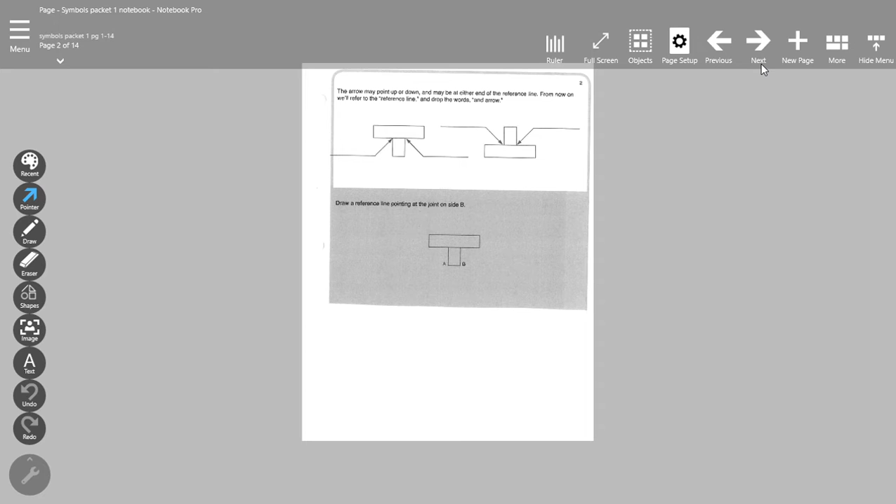So it says draw a reference line and arrow pointing at the joint on side A. So, of course, here's my side A. Pretty simple. All right, so the next one. The arrow can point up or down. Remember, it doesn't change the information. Okay? So, put the arrow pointing on side B. Pretty easy, guys. All right, so if a weld is needed on the arrow side of the joint, the symbol is placed on the arrow side.

So we need to understand that the arrow side is always the bottom, and wherever the arrow points is where the weld will be. If it is on the other side, it is going to be the opposite side of the joint. So here, side what is the other side, and side what is the arrow side. Okay? Side what is the arrow side, and side what is the other side. I'm sure you guys can get that. You guys are pretty smart.

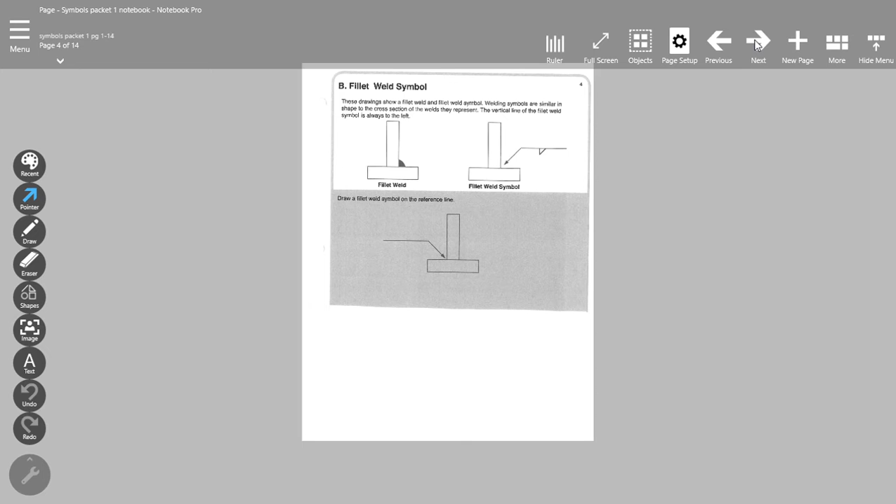All right, onwards. The symbol itself. We understand that the fillet weld symbol is a triangle. The up and down should always be on the left-hand side. Otherwise, you got it. You're an asshole. All right, here it is. Draw the fillet weld symbol on the reference line. All right, so when the symbol is below the reference line, it is the arrow side. If it is on top of the reference line, it is the, you got it, other side.

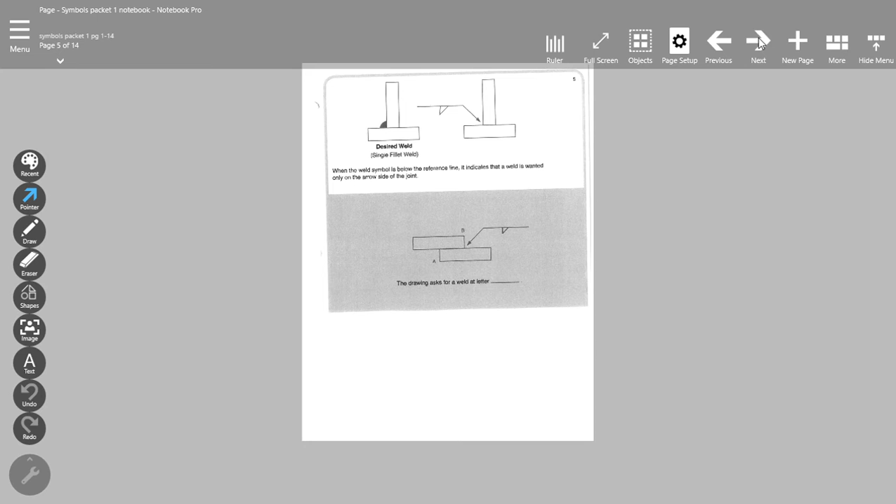Okay, so when there isn't room, sometimes they put it on different sides of the arrow. It makes it a little bit easier to put the desired information where we need it, okay? So on drawing B, a reference line points to the what side, and where is it not wanted? So I want you to put in the arrow where it's easier to put, okay?

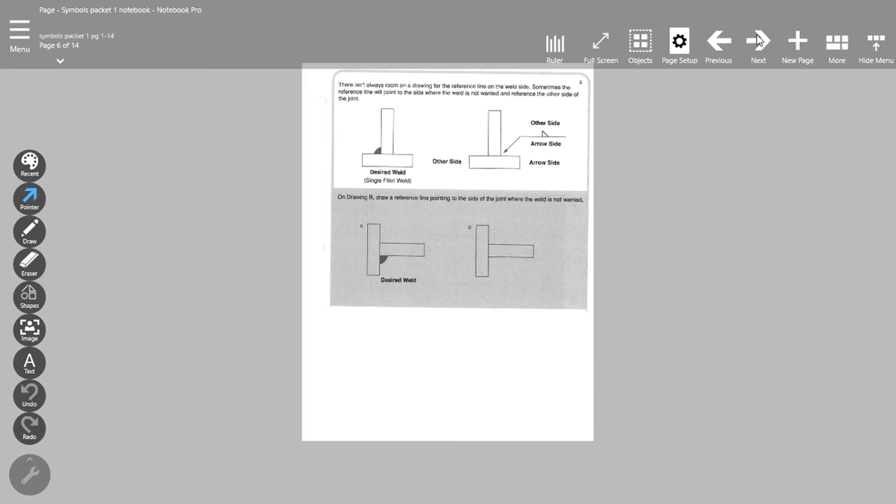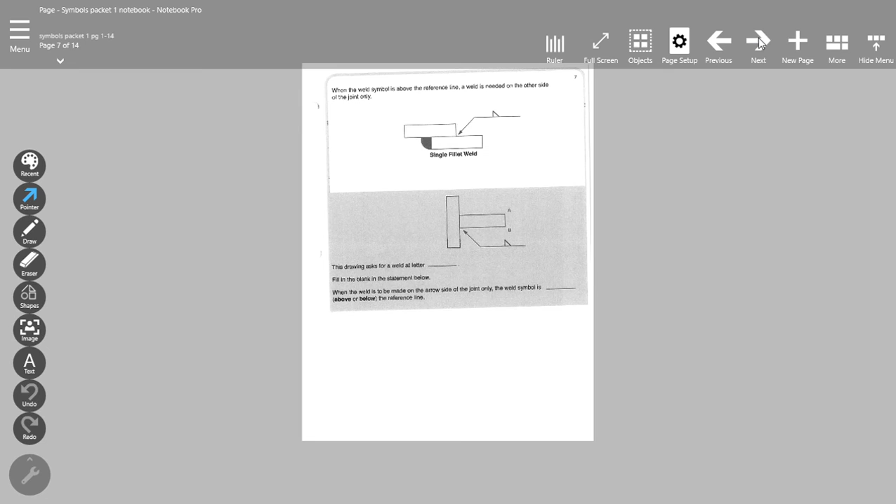Okay, so when the symbol is above the reference line, it is the other side. So our drawing asks for a weld at letter what? And we want to make sure that it's correct. When the weld is to be made on the arrow side of the joint, the weld symbol is above or below the reference line.

All right, now here it is. When we have this symbol on both sides, it is considered a double. Okay, so we have a double fillet weld. When we see this, it is on both sides. All right, so we can have it on the other side, the arrow side, or both sides. So they want you to indicate arrow side, other side, or both sides.

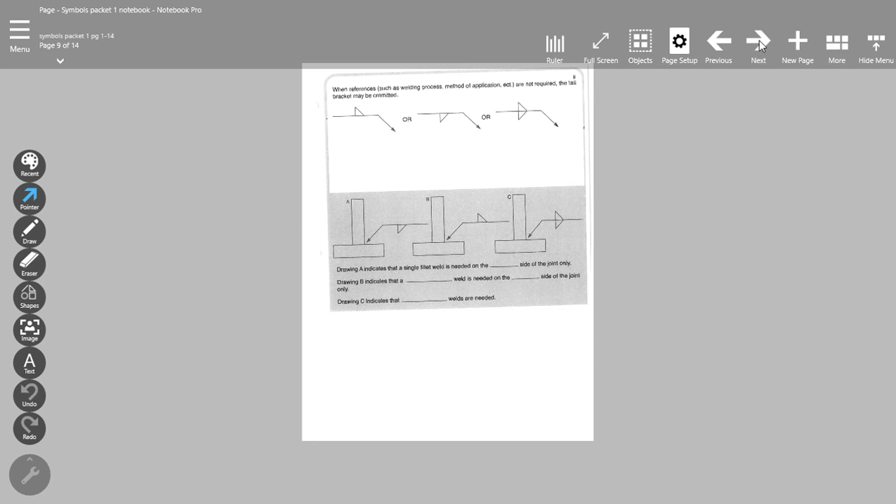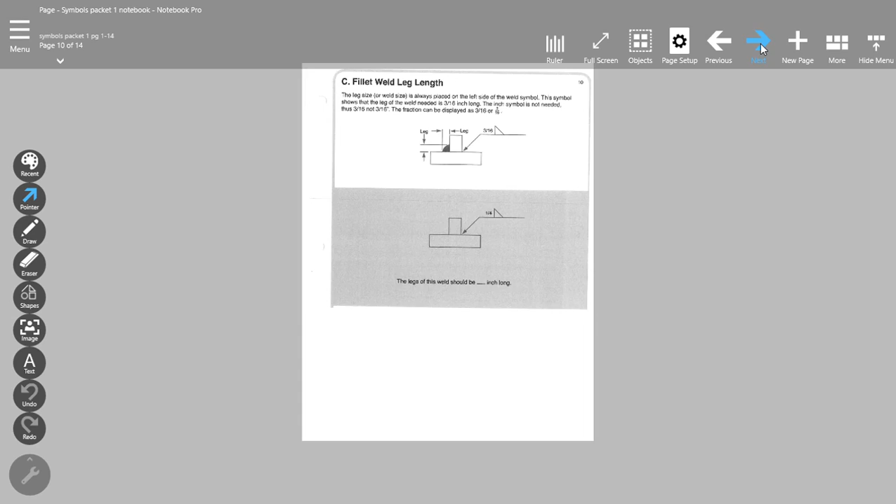All right, length. How do we measure the size of our fillet weld? We measure it from root to toe, which makes a leg. Okay? Unless otherwise specified, the leg is always equal. Okay? That is the size of the fillet weld, and it will always be to the left of the symbol. All right, one dimension shown to the left indicates my size. So on these, they want you to draw the size of the fillet weld.

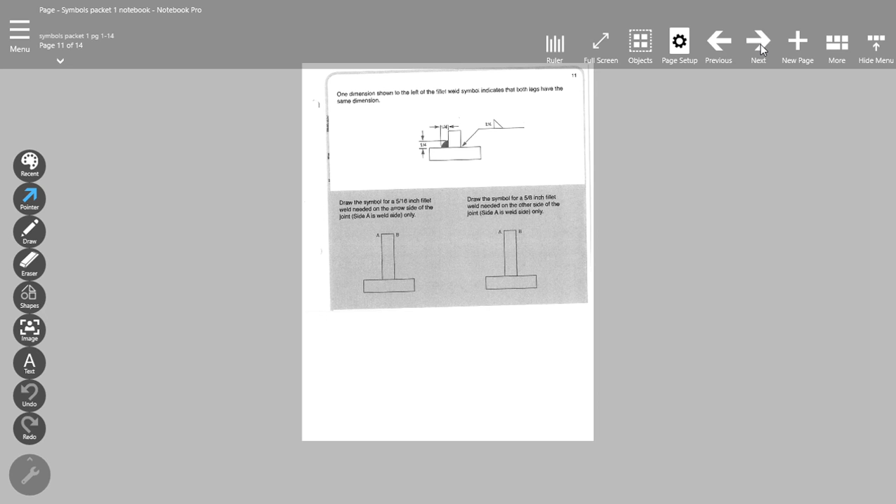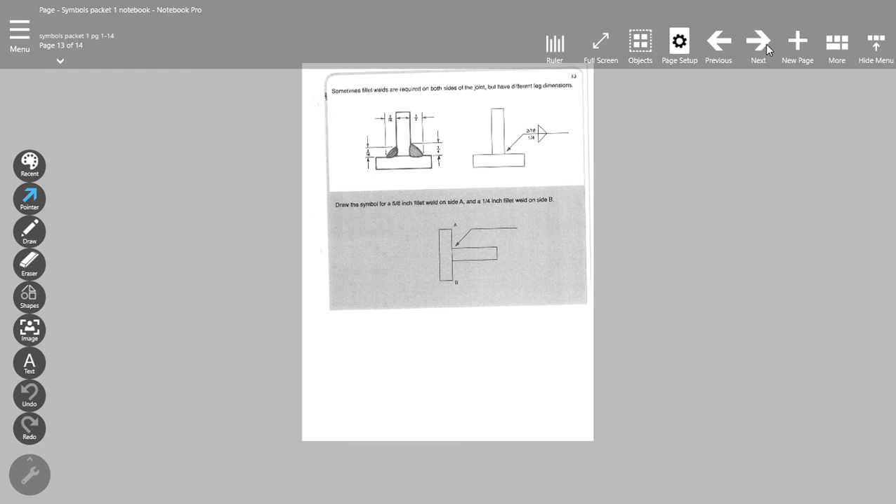Okay? In double fillet welds, they're going to put the size on both sides. And if we have a double fillet weld, we can even have different sizes on both sides. Okay? So they would like a 1/4 inch on both sides. All right, sometimes we have different sizes, and that's what they're giving us. So they'd like 2 different sizes on this one.